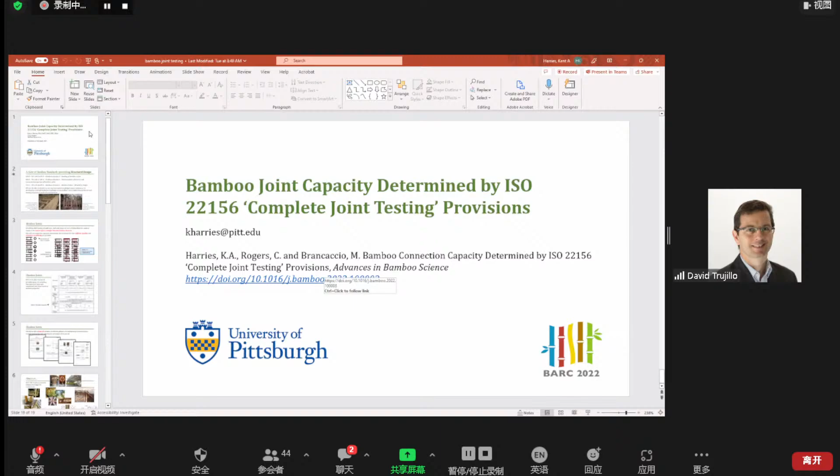All right, thank you, I'm going to share my screen. Like every good Zoom call, I will tell you what I'm doing. I'm going to share my screen, and then I will do the mandatory, can you see my slides? Oops, that's actually wrong, hang on. Yes, I can see them. Let's start at the beginning rather than the end. All right, so we're in slide mode, so there's my mandatory question. Close up that little box and we'll get started.

Okay, we're going to get started today and be talking about bamboo joint capacity by complete joint testing, the provisions of 22156. We're going to jump right into the new design standards and talk about some of the implications of these, and really show a process rather than the data. The data I'm going to show is not that important, it's really demonstrative. What we want to show is how we go about this process.

So I think at this point, hopefully most of the people online are comfortable and recognize that there are a suite of bamboo standards permitting the structural design of round culm structures. And of course, they start off with 19624, the grading standard, a procedure for grading bamboo.

David has been doing a lot of excellent work in really demonstrating how this can be implemented. We have the 22157 document, which talks about physical and mechanical properties, and these two will go together in using grade determining properties and what have you.

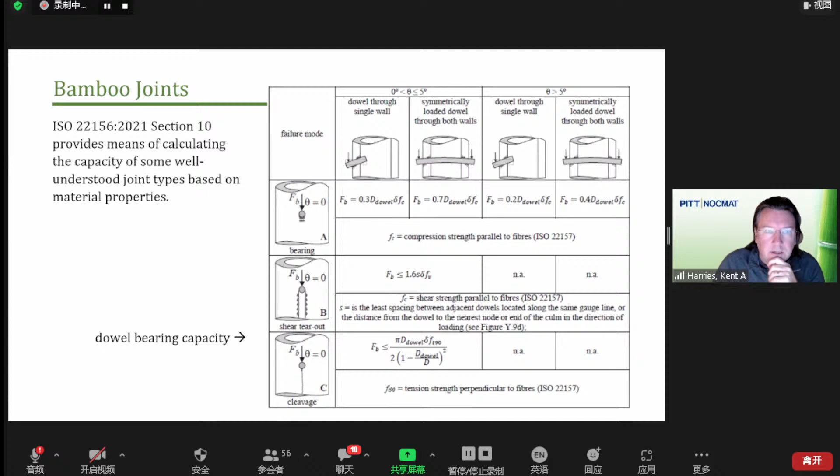Chapter 10 goes on, and references a useful informational appendix that looks at a number of rather conventional, and in some cases a little bit non-conventional, types of connections for bamboo. This is not really to say how you go about doing things. It is a bit of a roadmap. So if you're using a particular type of connection, here are the clauses, here are the parts of the code document that you really should be looking at. It's informational in that sense, and so these are useful.

But what one finds when one's designing connections, as we know bamboo connections are bamboo, the science behind bamboo connection design is quite nascent. We find that very often either we end up with very conservative designs that are very difficult to implement, or we just simply don't have a prescriptive means of design. And so we need another tool.

And that should be, and of course we need that because the potential number of different types of connections are almost infinite. We can have some very simple connections that might be appropriate in a vernacular sense, and of course we've probably all seen some very complex connections, machined connections and even 3D printed connections and what have you. So we need also a tool that can address all of these types of challenges that we have for connecting round members to round members, which is not exactly the easiest thing to do.

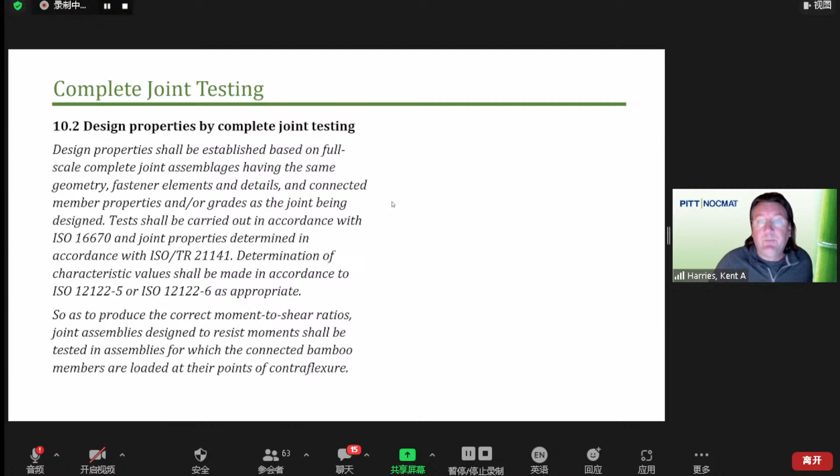There we go. And I just need to get this out of my way. Sorry, I can't see what I'm doing.

And we have a process that I'm going to take you through in this presentation. So the purpose of this presentation is not to talk about the connection that I'm about to talk about, but to demonstrate this process.

So the very first step is we ask, can the joint be designed by prescriptive guidance? And if it can, we can certainly use the prescriptive guidance in 22156. What I want to talk about now is when we can't, or we don't want to use the prescriptive guidance because we feel it's overly conservative.

And so we come into this next layer where we're going to use complete joint testing. And now we want to talk about what that complete joint testing is going to look like.

So the first step is we need to define the geometry and the material properties that we're using, the material properties maybe through 22-157 testing, or potentially through grading, 19624 compliant grading. So we can go either way there, I think. And then we actually conduct the testing.

So what I'm going to do is take you through a very simple example. It was intentionally a very simple connection, and it was also selected because it was a connection that we knew would not perform well in what we were asking it to do, because we wanted to make a couple of other points.

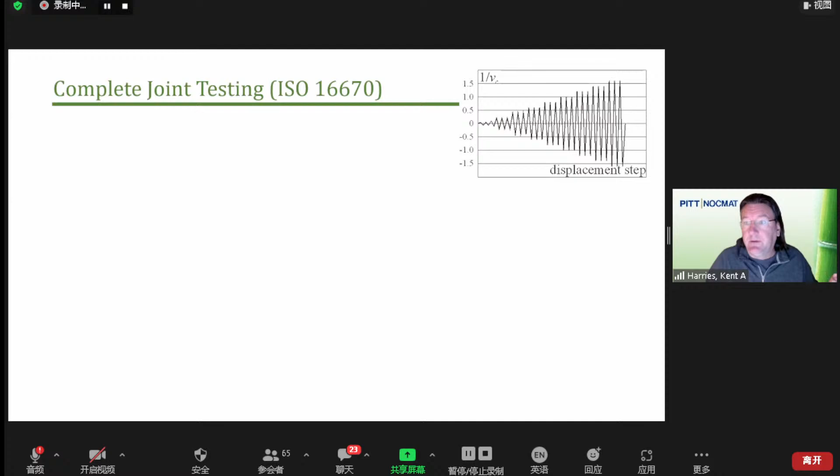Now we go into the testing, and this is what we're demonstrating. If we look at 16670, it's a process. We have a displacement load step relationship which we need to follow, that's prescribed.

So we've done the testing. Now what we need to do is determine the properties of these envelopes. What are the properties of my connection?

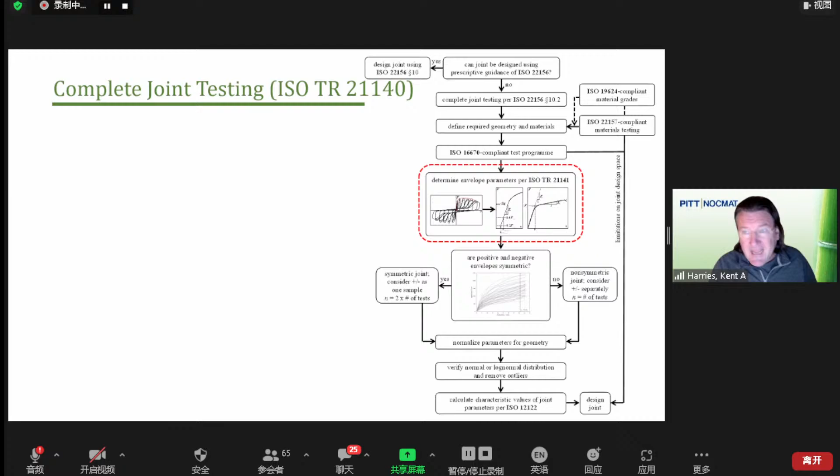We look to the technical report 21141, and we have various means of calculating the joint stiffness based on this backbone curve. If we have an essentially linear portion, we have a joint stiffness. If there's an initial slip, we account for that. If there's initial friction in the joint, different joints will behave a little bit differently, and similarly there's bilinear behavior.

In general, we're going to find that stiffness as the secant stiffness between, and the rule of thumb is 40% of the maximum and 10% of the maximum. It doesn't have to be that, but that's the guidance.

In addition, we find the initial stiffness in this manner. We then find the post-peak stiffness based again on the nature of the curve that we see. Is it a bilinear curve, in which case we just draw a secant having a stiffness of K sub P? If it's a degrading curve, we use 1/6 of the elastic stiffness.

We can use secants and offsets with degrading curves as well, or more of a typical offset method if we're looking at dowel behavior. In the case of this particular study, we used the bilinear approach.

Most of the data fit bilinear very well, in which case we have our rules for finding our yield point. We have our initial stiffness K sub E. We extend our post-peak stiffness backward until it intersects with K sub E, and we define the yield at that location. All of this is part of 21140.

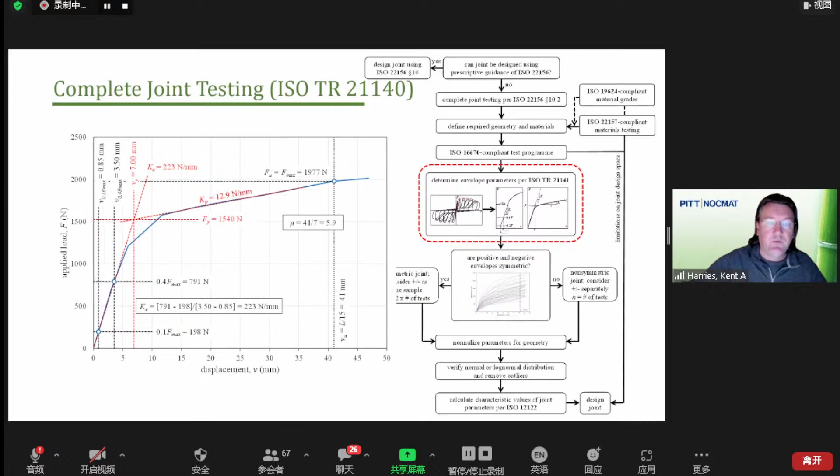Doing this to show the process, there is a data reduction process that has to be documented when we're doing this complete joint testing. This is just one example. Now, keep in mind, I've got 20 tests, so I've got 40 backbone curves, 20 positive, 20 negative.

That brings up the next question. I need to look at my data and determine, first of all, does it make sense? But secondly, in my particular case, this particular joint would be expected to behave symmetrically, where positive and negative behavior would be the same. If that's the case, we actually have 40 backbone curves. You could also imagine a joint geometry which is non-symmetric, where it's going to have a very different positive and negative capacity.

That being the case, we're going to have 20 positive, 20 negative. And so we want to test this hypothesis. In our case particularly, we want to see if we can treat both positive and negative together. So we do a simple unpaired t-test to compare the positive and negative cycles, the 20 positive and 20 negative. And sure enough, in terms of all the capacities we're looking at, the positive and negative cycles are statistically the same.

So we do have 40 data points, which actually is kind of nice and helps us out a little bit. It also confirms our hypothesis that this connection should be symmetric, and it is. If it weren't symmetric, we might want to look at a systemic error creeping in and look at our test setup.

Now we've got to normalize our parameters. It's not appropriate, typically, when we're looking at bamboo, unless we have very, very tight control, to simply look at force and displacement. We want to look at moment, rotational stiffness, and stress, because these are affected by the dimensions of the test setup, the length of the beam, and the dimensions of each of the elements. And these vary—it's bamboo. So we're going to normalize our data in terms of moment, rotational stiffness, and ultimately extreme fiber stress.

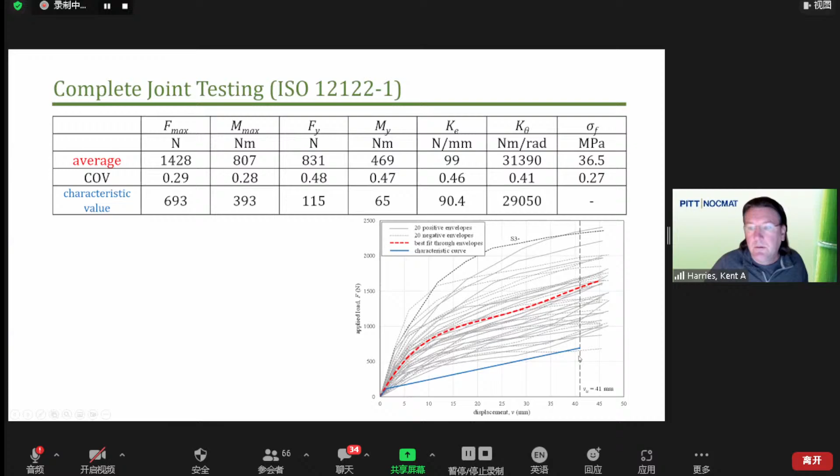Now this data, as shown here—here are all 40 curves—shows huge scatter, as we might expect from this type of connection; it's really not a moment connection. The red line is a best fit through all of the envelopes, an average curve if you wish. The blue line would be our characteristic value, assuming we're using 5% at 75% confidence. So a very low bound, very poor moment capacity for this connection, which is probably what we'd expect. That's the methodology we'd use for complete joint testing.

Just as some observations, I wanted to look at this particular test and the bolted fish mouth that we tested—after all, we have 40 data points and we may as well look at them. Our test setup actually pre-compressed, using the eye bolt to draw a fairly large force, 8,500 newtons, determined using a torque wrench. If I look at the compression force in the beam element, that's about 5.5 MPa using our average values. As we start moving this back and forth, we have different types of behavior.

We have dowel bearing type behavior, particularly at this location. It's interesting because if we look at our ultimate stress condition, we'd have tension in the eye bolt, compression at the top or bottom fiber of the joint, and opening at the opposite side. When we calculate the extreme fiber stress in this particular case, we had about 36 MPa, and that's where I want to bring you back.

The average capacity of this particular bamboo was about 43 MPa, so we're right in that ballpark. We actually designed a relatively efficient joint for what that bamboo can carry. Now, this is not an efficient means of resisting moment, largely because we have such a small lever arm that we can't get much force out of this, even with a relatively large stress.

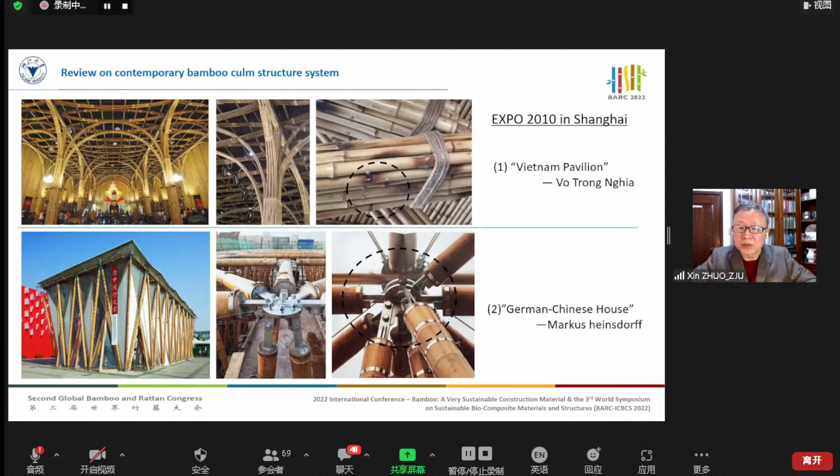Let me briefly review contemporary bamboo structure systems. At the Expo 2010 in Shanghai, there were two outstanding bamboo structures. One is the Vietnam Pavilion built by Mr. Vo Trong Nghia, and the German-Chinese house designed by Markus Heinsdorff. These two buildings, designed very differently, displayed two structural systems of current original bamboo structures.

There are many varieties of bamboo arch structure systems, including planar bundle bamboo arch structures, cross bamboo arch gel structures, and cross bundle bamboo arch structures. The construction of contemporary bamboo structure has been greatly aided by these remarkable structures. A large number of emerging bamboo grid joints have been developed in recent years.

Back in China, in recent years there have been many bamboo structure buildings developed. However, we noticed that while there were numerous bamboo arch structures, there were very few bamboo grid structures. We believe the major cause is that fabricating multi-directional joints is too challenging. It's difficult for businesses to manufacture, but if they try to purchase it from the market, it's very expensive.

The bamboo industry specializes in creating bamboo arches, so if they can produce bamboo arches themselves, they can generate higher revenues. Having said that, the bamboo arch structure system still has a cost issue because currently we mainly depend on artisans manually bending these curves by fire. It's low productivity with higher labor cost. As a result, bamboo arch structures have no cost competitiveness over timber structures, which is very unfavorable for the development of bamboo buildings.

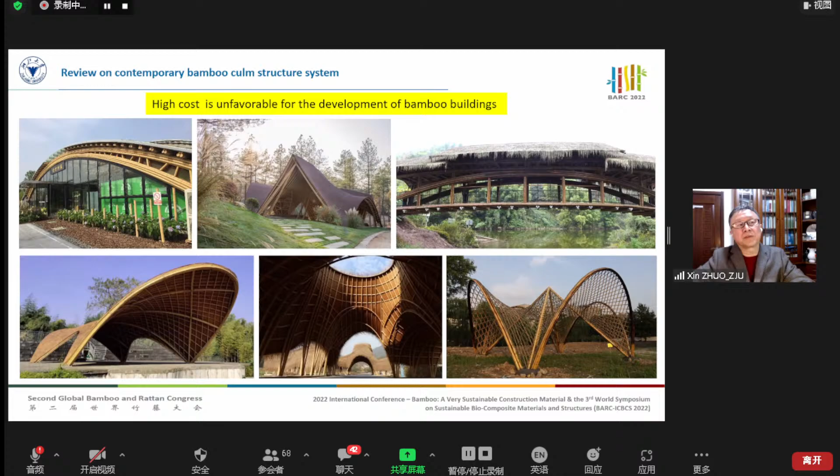We know that bamboo and timber are both bio-based materials. So if bamboo does not have a cost advantage, why should customers select bamboo, because it lacks mechanical qualities compared to timber? So we need to maintain the cost advantage.

There are two types of bamboo culm structure systems. High expenses are mostly a result of hand-bent bamboo tubes and customized multi-directional joints. It depends very much on the labor and the skillfulness of the labor, so we cannot standardize the construction results.

On the contrary, the bamboo culm grid structure has straight culms and low cost, but the disadvantage is making multi-directional joints lack universality. So what we at Zhejiang University are trying to do is combine the advantages of these two types. We use a straight rod plus bolt because a straight rod and bolt are both less expensive. But can we directly combine the two structures? It's impossible, so we have to come up with an alternative solution.

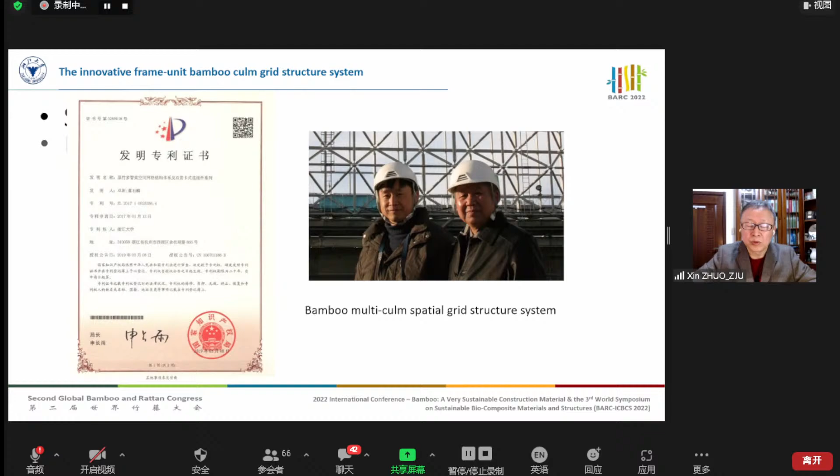Next, I want to move to the innovative frame unit bamboo culm grid structure system. In 2017, I followed my PhD supervisor, Professor Dong Shilin. We jointly promoted the bamboo multi-culm spatial grid structure system and got the patent. I'll give you a simple example.

We all know that for a grid structure, at the very beginning we would start with the axis and the geometry sizes. The key to the construction is the spatial layout of the connections and joints. What we are doing here is making the initially complicated three-dimensional connection into a straightforward one-dimensional connection. So you can see this is a very simple structure. No matter how complicated the shape of the construction, we do not need multiple dimensional connections.

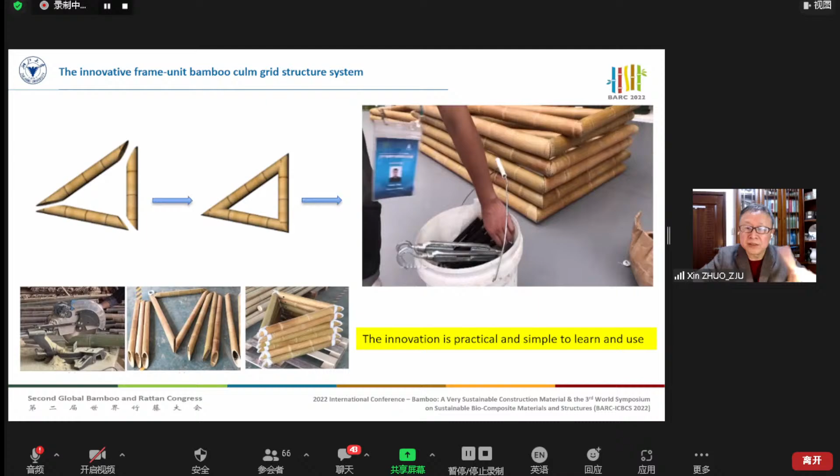We streamline the 3D connection issue into a 1D connection. There are two-step processes. The first is to fabricate the component in the factory. Second is on-site construction. For the on-site construction, first we drill the holes, and then connect the triangular frame by bolt to form the whole structure.

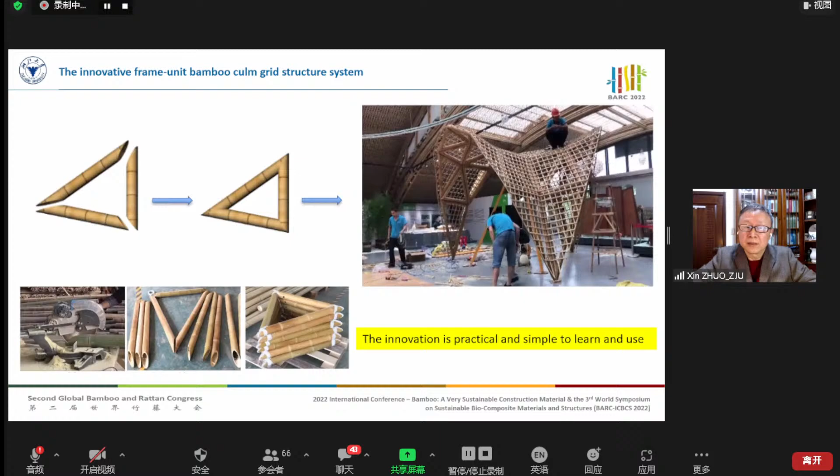You can see this is very easy to construct, very easy to learn. For the workers, if we teach them to do one triangular structure, they can repeat the whole process. For the whole construction team, if we can teach them the first project, then we can have a hands-off attitude, and we just provide them the data, and they would follow the exact steps as the first project. Very easy to learn.

Since 2019, we have created structures in the hyperbolic paraboloid. On the left-hand side, you can see this structure. I want to thank INBAR for your support and trust. After that project, we completed the cylindrical and spherical structures, which shows that these structures are quite suitable for the traditional steel structure constructions.

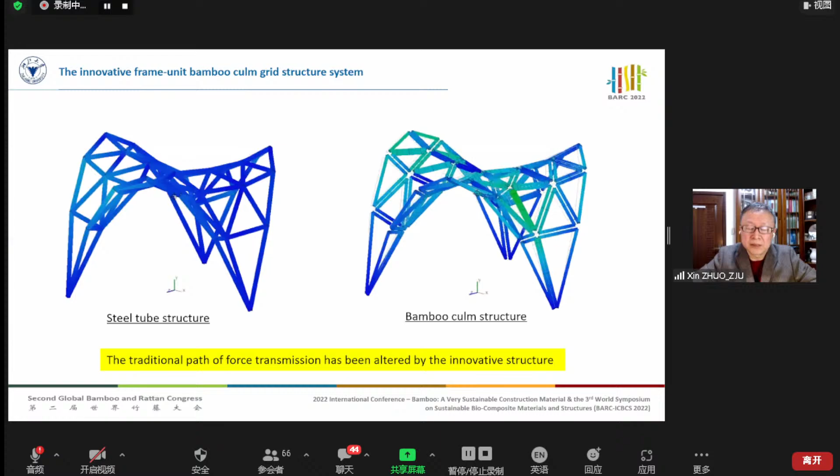But I'd like to draw your attention to these stress transition routes. You can see on the left-hand side is a steel tube, on the right-hand side is the bamboo culm. With the same wind load, the right bamboo culm structure deforms differently than the left steel structure. Of course, we need further study on the internal forces. Having said that, we can still see the stability of the bamboo culm structure.

Currently, we already completed from 0 to 1. But how can we make it from 1 to 100? This is a remaining issue. To make these bamboo structures more beautiful, cheaper, and environmentally friendly, we decided to change the combination method.

For example, some of these constructions use 2 bolts, some use 3, some use 4. It depends very much on the inner forces. This is the first consideration.

Second consideration: if there is any large span needed, this is for the 2022 Hangzhou Asian Games for the athletes and journalists reception center. Because this is a temporary construction, in order to save the cost and also to promote an environmentally friendly concept, they decided to use bamboo. We have 2 alternatives provided. The second one is a spatial grid truss to increase the structural rigidness so we can have a larger span. But unfortunately, due to COVID, this project was delayed until next year.

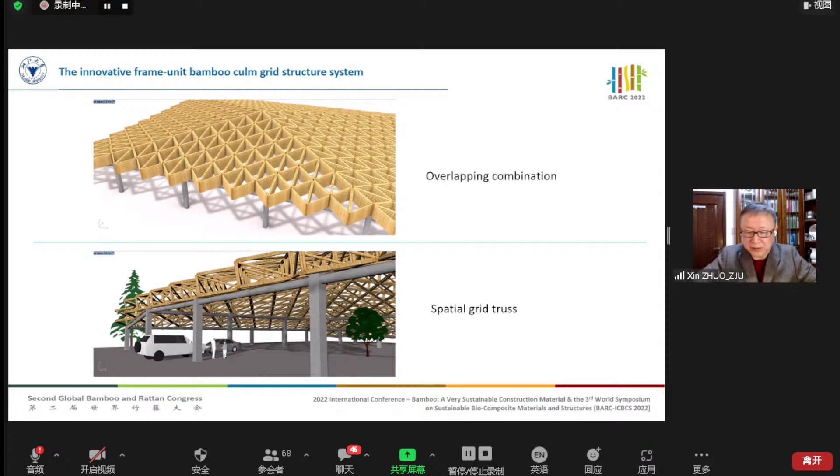So we hope that in future, other countries or cities, if we want to test the structural design, we can test it in the field. Another thing is the durability issue. For a bamboo structure, I think the biggest question is...

Hello? I don't know what happened. Zhuo, can you hear us? I think we lost him. Still connected? Let's wait 1 minute if he can reconnect, or we will move to the next speaker. David, what do you think? Yeah, let's give them a couple of minutes and then we'll move to the next speaker. Unfortunately, this is the problem of online meetings, right? Sometimes people disappear without any warning.

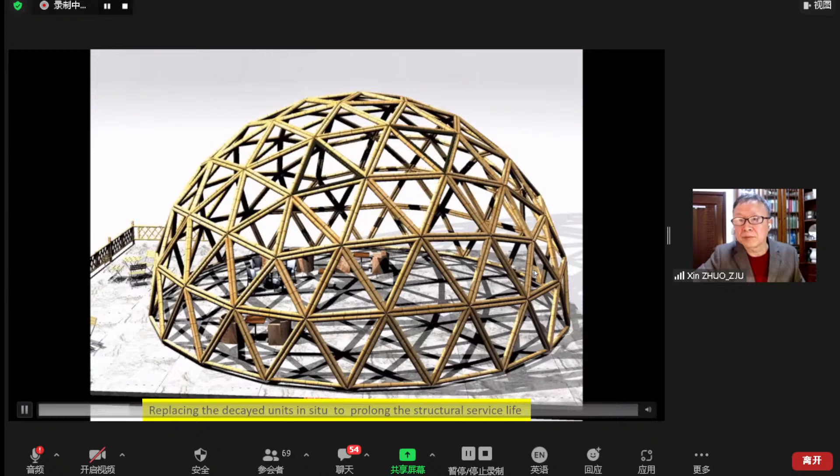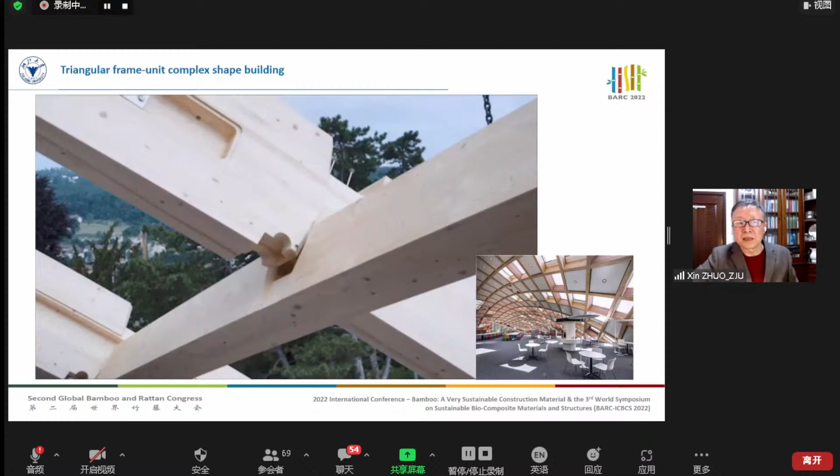Every piece has to be bespoke. The 2019 Swatch headquarters in Switzerland uses a similar design with timber. You have to be very precise when you make such a structure. Everyone wants to make a very beautiful, magnificent structure. Modern technology allows you to make such complex structures, but can anyone afford it? That is an issue.

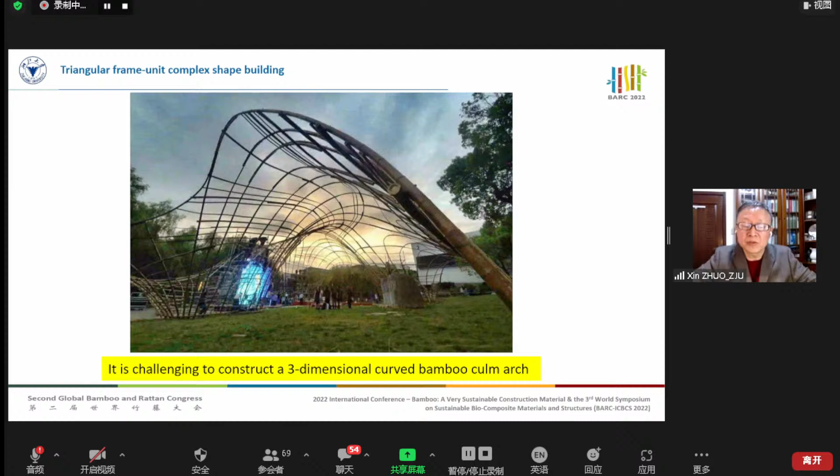The final one is a quadrilateral frame unit for residential buildings. Even with high-rises, people still want wood or bamboo interior decor for floors and walls. In many countries we have 2-story low-rise buildings made of wood, where structure and interior decor are two in one—no need for secondary interior decor.

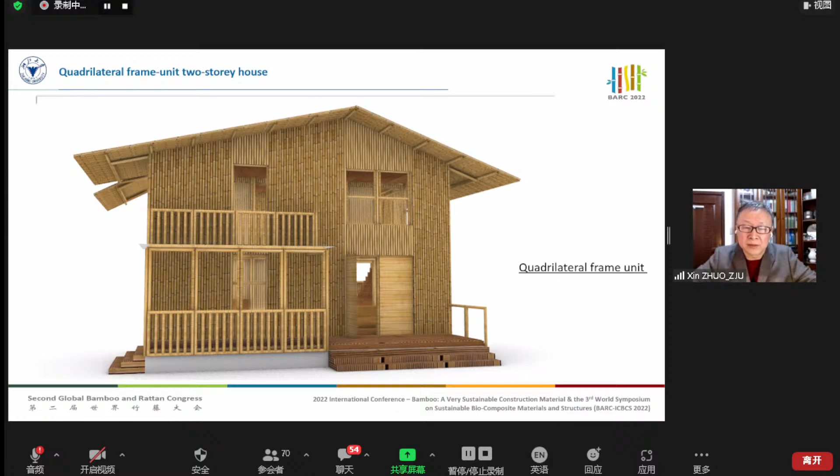It is like modular, installable in situ, and the connection method was explained before. It's a quadrilateral frame, while the other is triangle—of course they have different mechanical properties. We just want to offer a second choice for people: if you really like timber or bamboo structure for a construction project, you can have a good value-for-price, lower cost alternative choice. Our student also designed and built a miniature building.

We also work with B&B hostels, and we have some structural designs using block-based smart calculation algorithms for fast programming and to figure out the spatial dimension layout of different building blocks for high efficiency design.

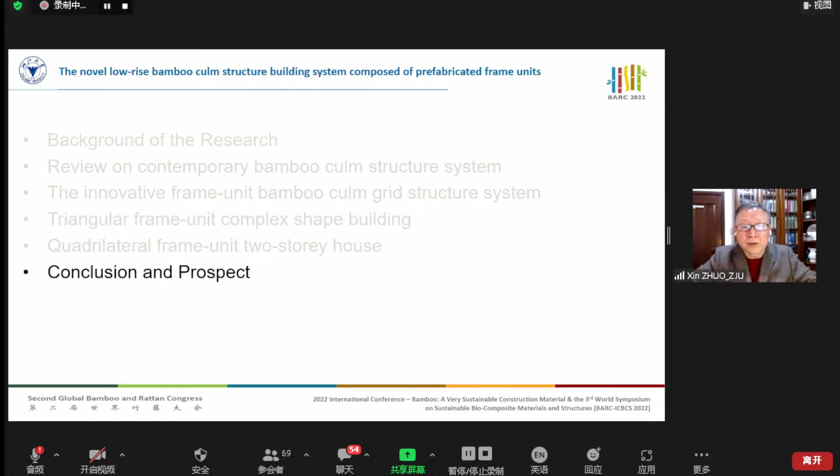Final conclusion: engineering practice verifies the viability of the prefabricated frame-based low-rise bamboo culm structure building system. It has low technology intensity, and is simple to learn and spread. Second, the triangular frame unit bamboo culm grid structure is most cost-effective for complex-shaped buildings. Low-rise bamboo culm structure houses have enormous market potential as long as the quality meets the expectations of modern people and the price is affordable.

It has huge market potential. Number four, replacing the decayed frame unit in situ is an effective way to prolong the service life of the bamboo structure. Okay, I've finished. Thank you very much.

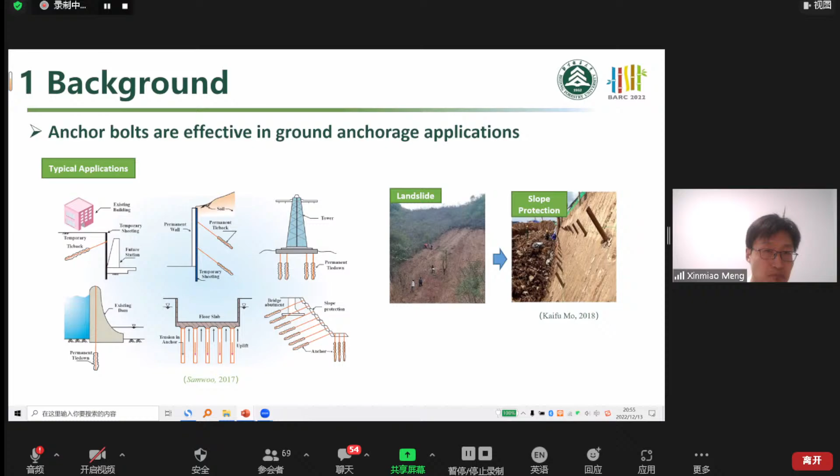In addition, the anchor bolt could be used in lots of applications as shown in this figure, and it has been proved that the anchor bolt is effective enough in ground anchorage applications. Generally, anchorage bolts can be divided into 3 types, including mechanical, bonded, and hybrid ones, and they mainly carry on axial tension in soil slopes.

We usually use steel bar and some conventional materials to produce the anchor bolt, like steel, wood, and bamboo products. In addition, some new materials have been explored in anchor materials like FRP, GFRP, and composite components. At present,

we want to use some green, ecological, and sustainable materials to reduce carbon dioxide emissions, and we also need to increase the ductility. In this regard, we proposed a new composite anchor bolt.

It's composed of FRP, fiber reinforced polymer, and bamboo materials. It has a self-anchored U-shaped end, and it also contains 2 kinds of grout materials: one is ecological grout, like ecological concrete, and another is high-strength grout.

Using this anchor bolt, we can combine the plant root system and the FRP composite bamboo anchor bolt. We want the root to grow into the anchor bolt, and in this way, an integrated anchor slope protection system can be developed once the root grows into the U-shaped end.

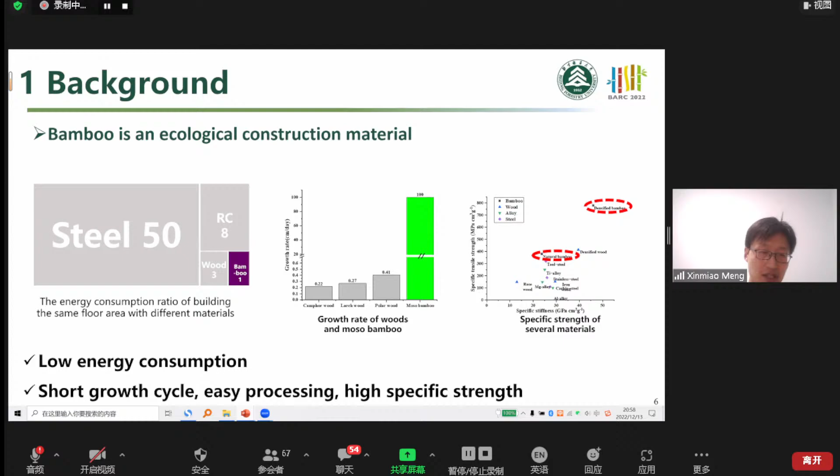We also calculated the carbon emission factor for round bamboo. It was found that the emission factor for round bamboo is very low compared to conventional materials, and if we consider carbon sequestration, it can be a negative carbon material.

In the carbon emission factors, the major part comes from the thermal bonding process, as Professor Zhuo mentioned. If we reduce or replace this liquid natural gas (LNG) with solar energy, we can decrease the carbon emission factor significantly.

So we think bamboo is an ecological building material. Another thing is that China has abundant bamboo resources, which helps reduce the cost of bamboo structures.

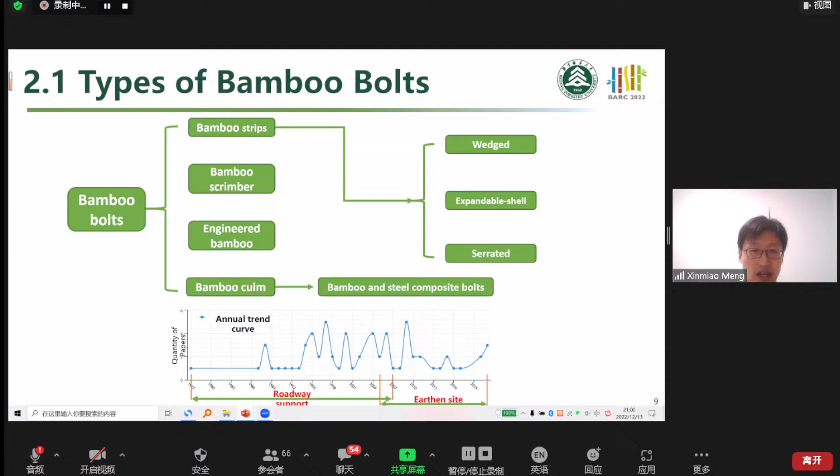Then we conducted a literature review of bamboo bolts. We found that bamboo bolts have been used since 1977, mainly in roadway support of coal mines and earthen site protection. Different bamboo materials have been explored, including strips, scrimber bamboo, engineered bamboo, and bamboo culms.

For the rigid structure, like the steel bolt, it is used on the ground side anchor head, including single-wedged and multi-wedged ends. Another option is that if we want to increase the anchorage, we can use an expansion shell in this place.

Besides the wedged ends, bamboo bolts can be designed as serrated segments. For scrimber bolts, it is very similar to steel bolts, since both its strength and durability can be improved a lot.

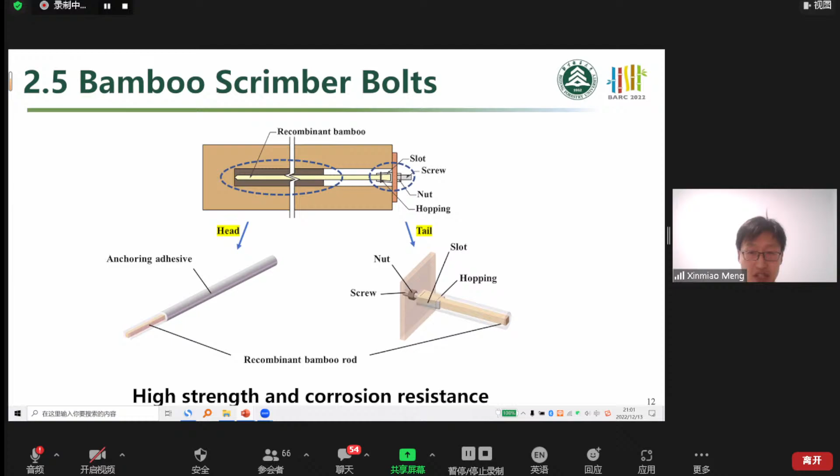Also, round bamboo culms can be used individually or combined with steel rebar, as shown in the figure. They have already been applied in earthen site protection.

Next, I will introduce the self-anchored bamboo bolts. The U-shaped anchor bolts could be defined with the slope angle, the thickness, and the diameter. And it can be achieved by two methods: thermoforming and winding.

Like Professor Zhuo mentioned, we can use thermoforming to make the curved bamboo culm, but the temperature is unknown, and the carbonization of the surface cannot be avoided. So we want to improve the thermoforming process and obtain the suitable temperature range. We studied different thicknesses of the bamboo strips and applied different temperatures.

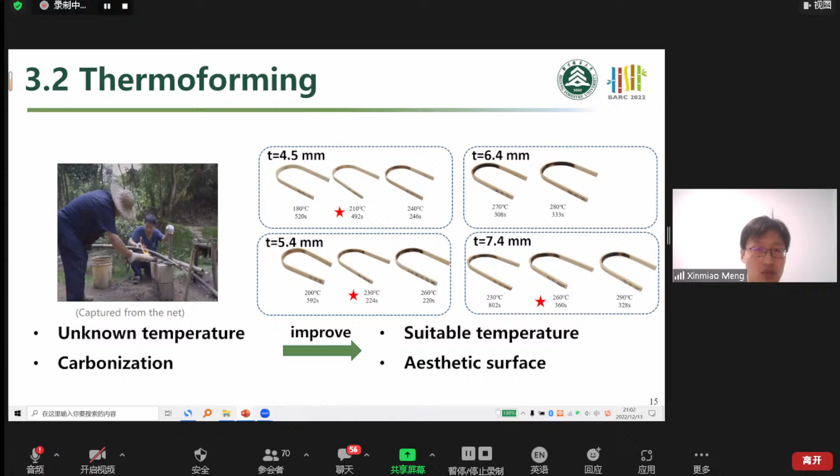We also conducted a 4-point bending test. We found that the flexural modulus changed with the temperature, but I think more microscopic research should be done to explain the relationship between the modulus and the temperature. We just found the trend, but we didn't find the rule.

Then we tried another way to make the U-shape, which is a winding method. We use the bamboo strips and winding with FRP to get FRP bamboo composites. We developed a method based on image recognition to design the mechanical properties of bamboo bolts, because different strips vary.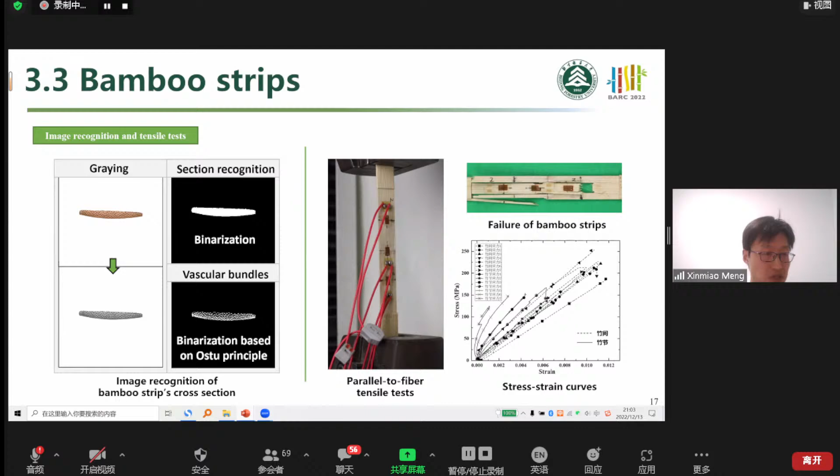Here's the relationship between the fiber volume fraction and the tensile strength parallel to grain. Then we conducted the tensile test for the bamboo bolts. In this case, the GFRP was just used as the coating. We found that most of the specimens filled with fiber rupture at the U-shaped end.

We also designed a pull-out test. It was still under test due to COVID-19, but the theoretical analysis has been done.

We divided the self-anchor composite bolt into two parts. For the linear part, we built a model to predict the shear stress at the interface and the tension force. We tried two models; this one is based on the half-space model and elasticity.

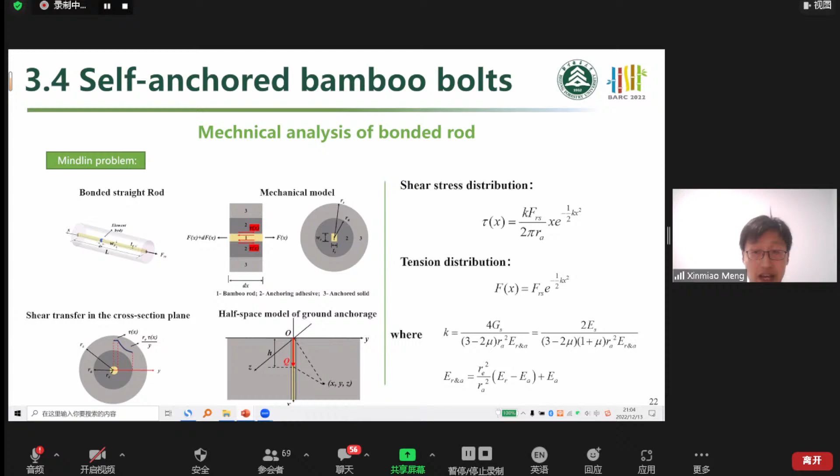We conducted parameter studies to find the relationship between the elastic modulus and the shear stress distributions. Another method is the bond slip constitutive model. Among these models, we prefer the trilinear model to predict the bearing capacity.

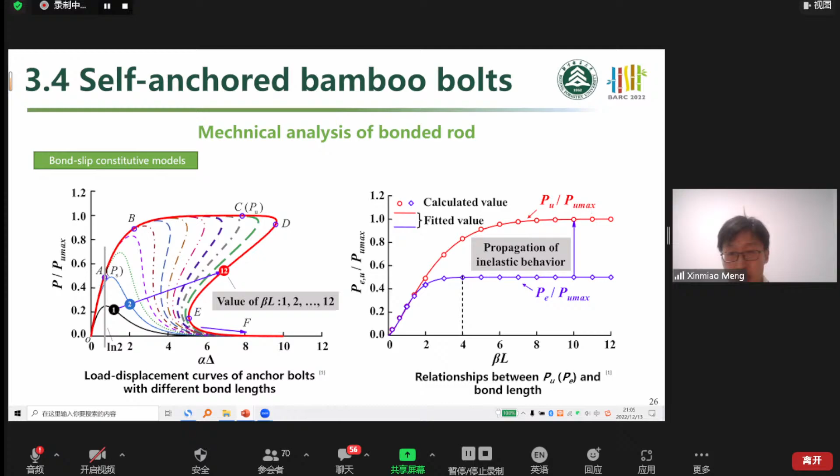After the U-shaped anchor, we combined the thin shell model and the thick shell model to get the load distribution and stress distribution across the section. But for the thin shell model, because it didn't consider the thickness, we don't know the stress distribution across the cross section.

For the thick shell model, we can obtain the stress distribution across the cross section, but we cannot consider the friction at the interface. So here are the results: we can get the stress distribution along the bolt and across the cross section.

Then we combined these two methods together, and here are the theoretical results compared with the experimental results. We found the results showed large deviation, so we think we need lots of tests to evaluate the accuracy of these two models.

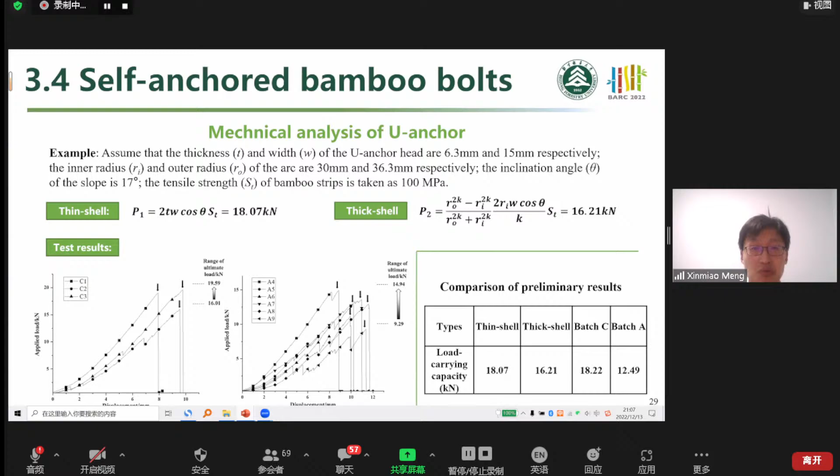We also conducted a finite element analysis to verify the theoretical model. It proved the effectiveness of the thick shell model.

Here's some conclusions for the self-anchor bolts. First, we found the temperature is related to the elastic modulus, and we need to optimize the temperature for each thickness. The U-shaped anchor could improve the tensile and load carrying capacity for the anchor bolt.

We also studied the theoretical analysis based on elasticity and the thick shell model or thin shell model. We think that if we want to fully develop the tensile strength of the FRP and bamboo materials, we need to design its slope angle, thickness, and also the inner diameter of the bolt.

So finally, in the end, we draw two conclusions. First, we proposed an ecological self-anchored FRP bamboo composite anchor, but we also need more tests to verify our concept. We think it can provide enough load carrying capacity and durability, because we want the FRP to provide durability, and if the root grows into the anchor bolt, we think we can build an integrated slope protection system.

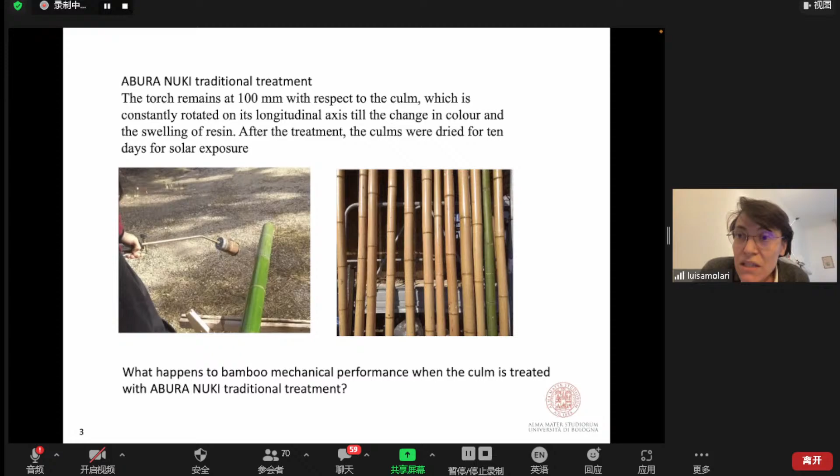So our question is: what happens to bamboo's mechanical performance when a culm is treated in this way? To answer this question, we took a culm — this is part of a study on the mechanical characterization of Italian bamboo.

We took Italian bamboo of the Phyllostachys viridis species from the central part of Italy, from Macerata, provided by the Polyedra Association, which uses bamboo in social contexts.

We took these culms and selected two parts: a bottom part from 0.5 to 1.5 meters, and a top part from 2.5 to 3.5 meters.

We performed tests on these two parts of the culm, both treated and untreated. First, we looked at density and moisture content, and found that density is slightly higher in treated bamboo compared to untreated, but not statistically significantly so — going from about 680 kilograms per cubic meter to 740 kilograms per cubic meter.

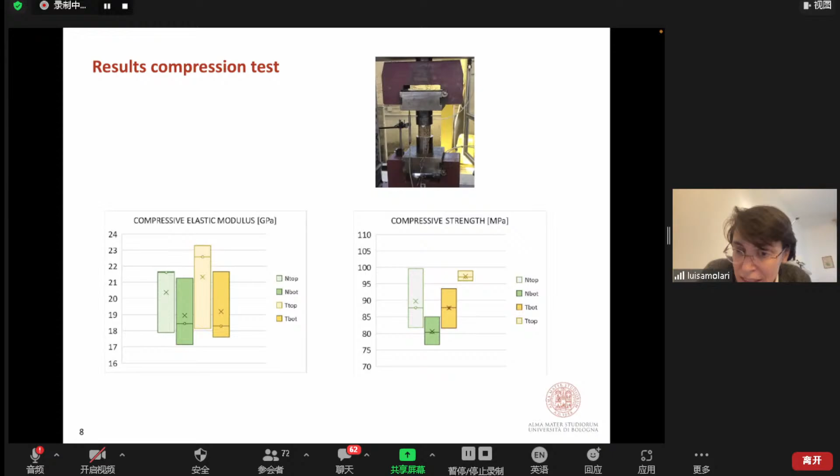For the compressive strength, we see more or less the same thing, because if we compare the darker with the darker and the light with the light color - the part from the bottom and the part from the top, each with its corresponding specimens - we do not see much difference even in this case.

What is quite different between treated and untreated samples is the Poisson ratio, which is the ratio between the circumferential and the longitudinal deformation of the specimen. For the untreated, all the specimens are in a much closer range compared to the treated samples, and this could have an explanation - I will come back to this in the following slides.

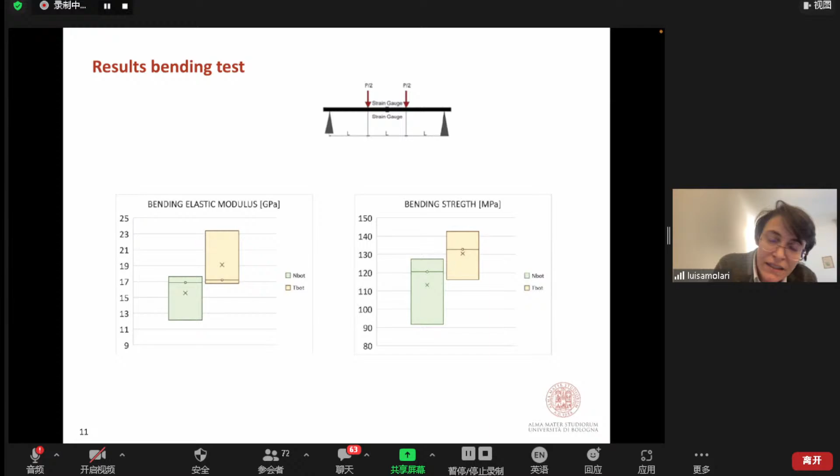For the specimens after the bending test, we took micrographs with electron microscopy, and we see that for the treated samples we had a sort of texture - there are some cracks between the island of fibers and the parenchyma cells. I hope you can see it, but the differences between the two are evident.

This could also explain the differences in the Poisson ratio, because we do not see damage in the direction of the fibers, but we can see damage between the fibers and the parenchyma. This could bring more or less the same behavior in the direction of the fibers, but something different in the direction orthogonal to the fiber itself.

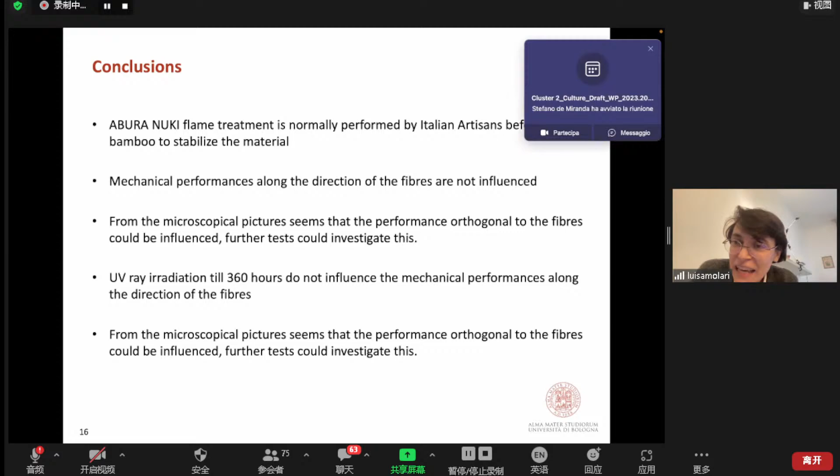For the duration of the irradiation, because we started to see a slight damage on the mechanical performance.

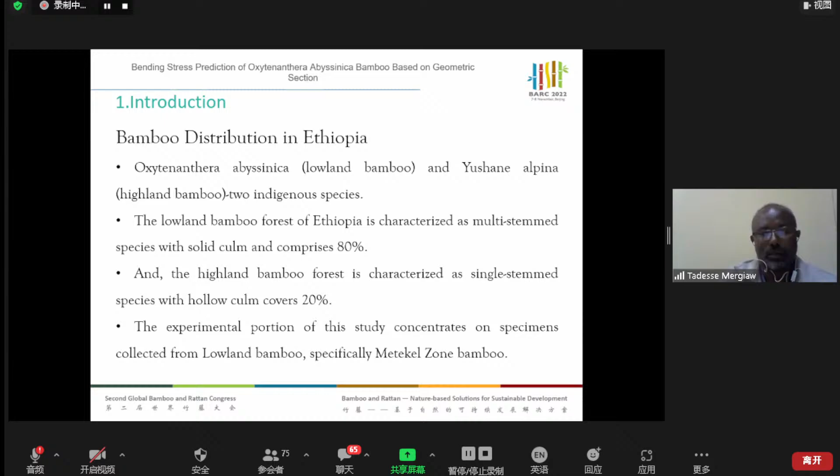Considering the culm geometrical shape, these two species have different geometry.

Yushania alpina is 10 to 12 centimeters thick and consists of a hollow culm. It may have a maximum height of 16.75 meters, as previous research reveals.

While the Oxytenanthera abyssinica bamboo has solid, semi-solid, and hollow sections. When you take a 3.5 meter section...

...it consists of a solid section from the bottom, a semi-solid section at a certain height, and again a hollow section.

But these sections vary depending on the age. I mean, when the bamboo is at 1 or 2 years of age...

...the semi-solid and hollow sections are a little shorter, while consisting of less solid section, in a 3.5 meter specimen.

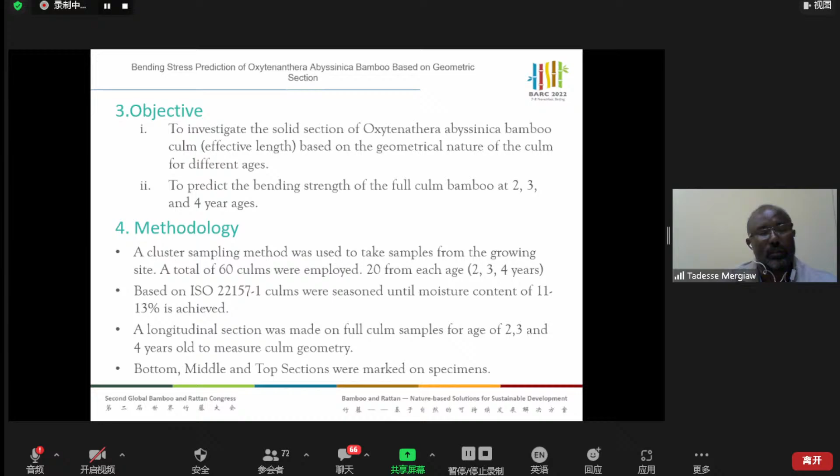This is the area where the bamboo is collected, in a region we call Metekel. As shown, the bamboo species is sketched as solid section, semi-solid, and hollow sections, then it is clustered, categorized, and measurements have been conducted.

This is a simple sketch of how the cross sections look when the bamboo is sampled at 2.6 meters, showing solid section internodes, while at 2.6 to 3 meters, how the hollow sections look, and the cross sections beyond 3.2 meters having a hollow. So systematically we have a solid section sampled, other lengths up to semi-solid sections, and the hollow sections within a 3.5 meter specimen.

So the next step, to conduct the flexural test, a test rig is prepared, and using a UTM machine, applying the load, we start measuring.

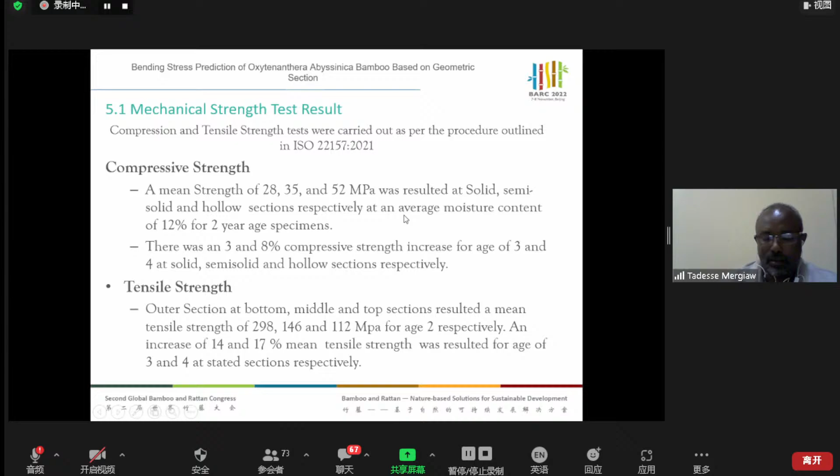The other testing, the main part of the research, is the bending test result. As mentioned earlier, the bamboo was categorized by age 2, 3, and 4 years, with bottom diameter and solid section length, as previously stated, and the internal length and top diameter geometrically measured, giving us the ratio of top to bottom. Then the flexural strength and mid-span deflection is measured.

These results are outputs from the UTM machine. Based on the statistical analysis, the length of the solid section at age 4 is shown here, where the horizontal axis is the ratio of top to bottom diameter, and this is the length of the solid section. For 4 years, it's expected an average of 2.8, 2.5 for solid section length, resulted at a mean diameter ratio of 0.64.

For age 3, when the ratio of top to bottom diameter is an average of 0.77, the length is less, 2.6, 2.5 is resulted. At age 2, it's 0.83 mean diameter ratio, top to bottom ratio, but the length of the solid section is below 2.4. So from this result, we can estimate that a maximum of up to 2.8, 2.85 meter solid section length is available at age 4 when the diameter ratio is 0.64.

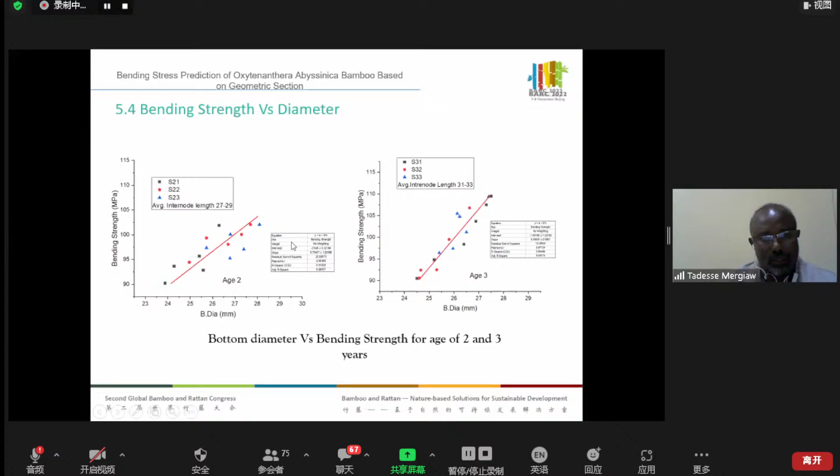The other result from this research is the bending strengths versus the diameter ratio, and bending strengths versus bottom diameter. The results in 3 specimens, 3 types of specimens, are conducted, shown here similarly at age 2 and age 3.

So the final bending result values: the solid section is predicted linearly with 5.8D, 6.4D, and 7.2 times D for age 2, 3, and 4 respectively, with the statistical values in each section. Here is the final conclusion resulted from the statistical analysis.

That's my presentation, it's a very short one. I finalized it in this way.

Thank you very much, that was a great presentation. I greatly enjoyed it. I have a lot of questions, but we'll leave them for later on. Alright, Christopher, over to you. Alright, alright.

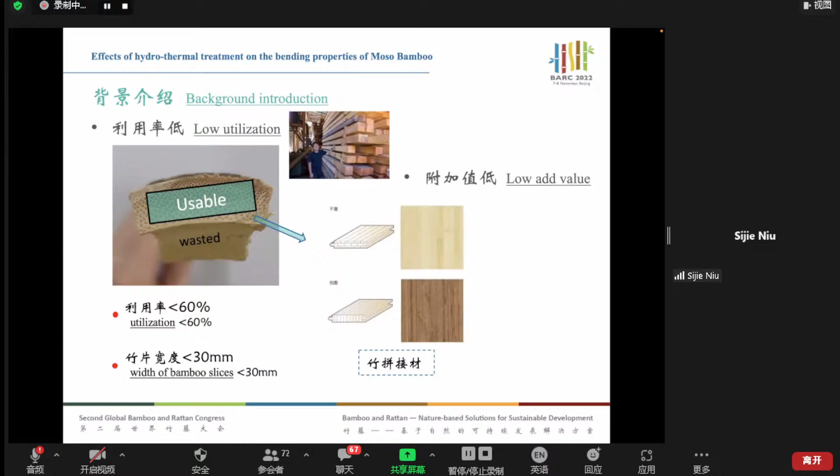The origin of my project is based on the National Key R&D program during the 14th five-year plan period. Our purpose is to improve the bamboo utilization ratio as well as improve the added value.

We try to first develop the bamboo into bamboo slices and make them into laminated plywood. Although the technology is not very new, we seldom see corrugated bamboo mat plywood. During the processing process, we understand that due to the poor toughness of bamboo material, it severely limits the form of bamboo products.

So we use some solution treatments, and we also use a water bath treatment method. Based on the different temperature, you can see the concentration level differences with regard to elastic modulus and bending strength. It's negatively correlated to the temperature and the concentration. With a longer period of higher temperature treatment, bamboo can become more flexible.

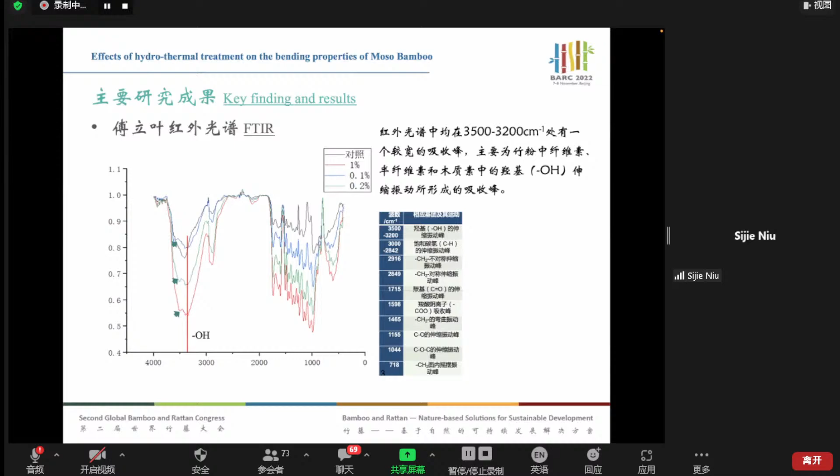This is using the FTIR testing method. You can see after this FTIR, there is a significant change in cellulose, hemicellulose, and lignin in bamboo powder. Without treatment, you can see there is a small absorption peak here. In the interest of time, I would skip the detailed elaboration of this graph.

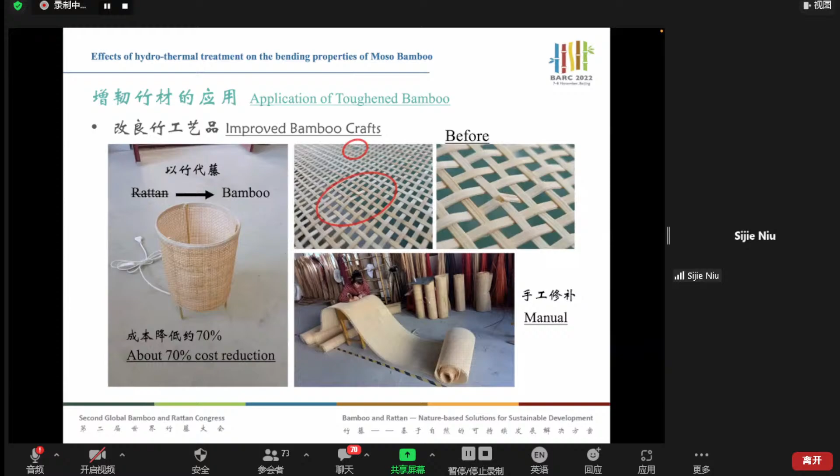Previously, the company used manual or skillful workers to repair breaks using glues and adhesives, but this resulted in very low productivity and high labor costs. However, after our toughened treatment, you can see the comparison before and after. On the left is before treatment, and on the right-hand side is after treatment. You can see the radius of curvature is significantly reduced.

And to some point, it can break, just like steel materials. That is before treatment, but after the treatment, you can see there's no breakage, no splitting of the bamboo. That shows the performance after treatment improved thanks to the absorption of the energy.

The right-hand side two pictures showed the final result after the toughened treatment process. You can see this is a very large size product, but there's no breakages.

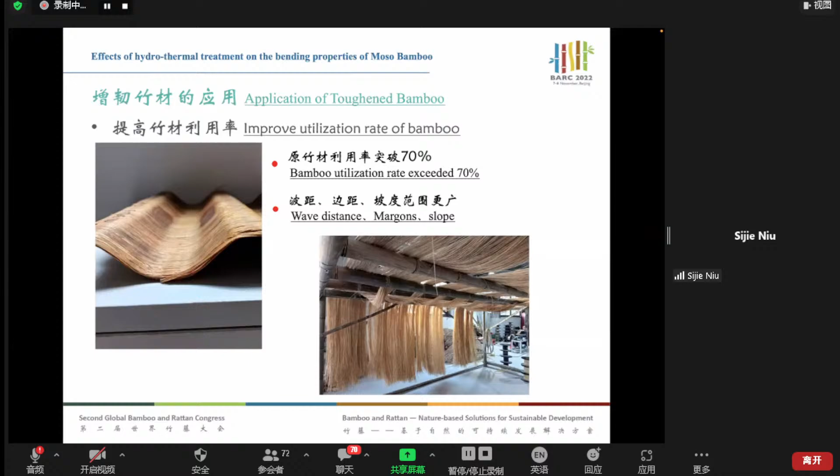After this treatment, we can improve the utilization rate to over 70%. Of course, this is only a lab test result. Secondly, we can have a wider selection on the wave distance, margins, and slopes.

Next, the prospects of bamboo toughening technology. Currently, we know that a lot of inner decorations inside the automobile and aviation interior use bamboo fibers.

But due to the properties of fibers, sometimes it's not strong enough, not toughened enough, especially with a larger span. It's very easy to break.

Especially for those unique shapes, it's difficult to apply traditional bamboo fibers, but with this toughened process, we can use bamboo fibers more widely. Previous speakers also talked about this fire treatment method.

And then the cellulose will crystallize, and... okay, thanks, I will finish.

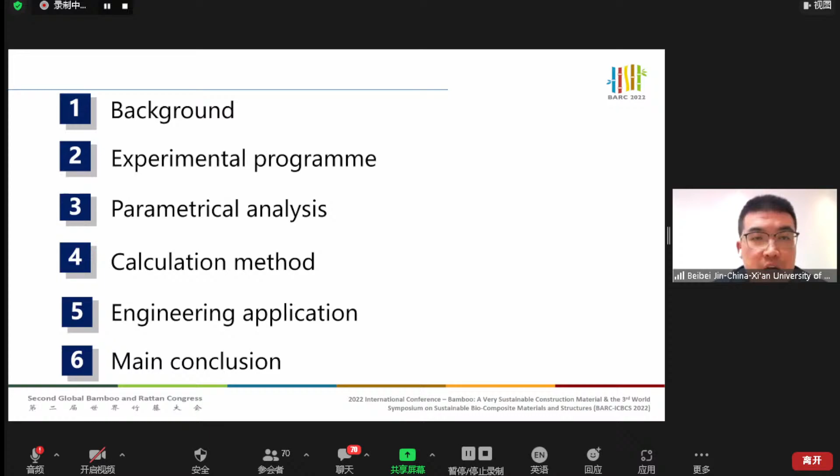I'm from the Xi'an University of Architecture and Technology. I'm a PhD student. I'm talking about the study on axial compressive performance of sprayed composite mortar original bamboo composite columns and engineering application. So I will talk about background first.

First, the construction sector has a low raw material and resource use efficiency, with serious pollution and energy consumption. So we really want to choose the best feedstock or best material for the construction.

Currently, we try to be lightweight, environment-friendly, and sustainable. China has a huge production output of bamboo. Naturally, people are looking into bamboo as a possible candidate.

Advantages include short growth cycle, green, eco-friendly, high strength to weight ratio, good deformability, and disadvantages include irregular geometry, initial natural defects, rot and moth-eaten durability issues.

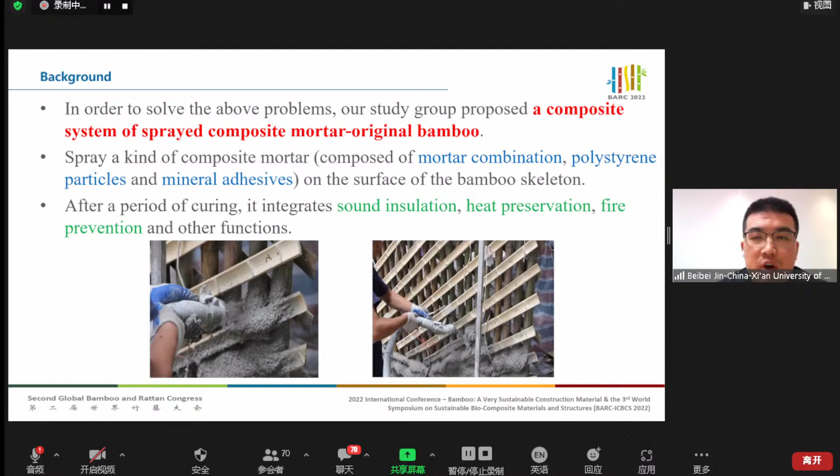So when we combine the two sides, we try to use a composite design. In our team, we propose a new type of bamboo structure: sprayed composite mortar and round bamboo. And we published some papers in Chinese and foreign journals.

We spray a kind of composite mortar composed of mortar combination, polystyrene particles, and mineral adhesives on the surface of the bamboo skeleton. And after a period of curing, it integrates sound insulation, heat preservation, fire retardation, and other structural functions.

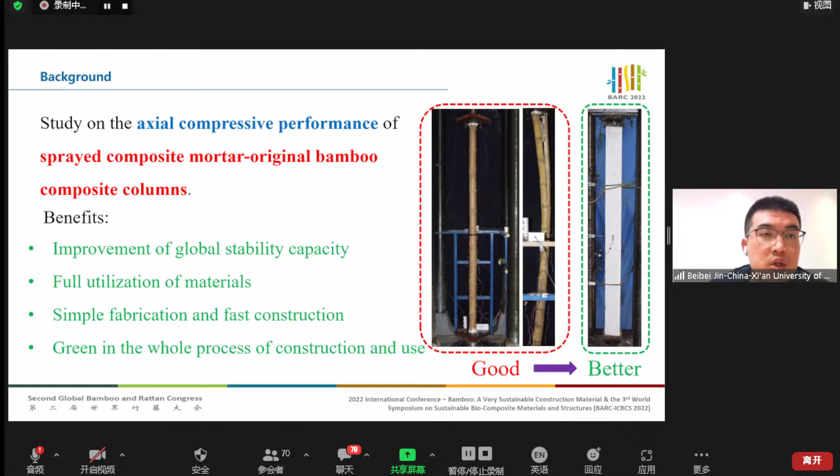I will talk about the second part: the axial compressive performance of sprayed composite mortar round bamboo composite columns. It can improve global stability capacity and fully utilize the materials. It is simple to fabricate and easily assembled, and green throughout the whole process of construction and use. Coming from round bamboo, after using this composite structure, it's even better in terms of performance.

I've designed specimens with longer and shorter columns. We have round short columns, and also coated mortar or sprayed mortar coated columns, and thirdly, aligned composite mortar with a square cross-section, and also a round cross-section with a protrusion, and aligned cross-section round cross-section columns. We can also mix and match different dimension specifications of specimens, cross-sections, and loading modes.

We have a full section loading, or only load onto the bamboo part of it. We are actually looking at the loading methodology of reinforced concrete within steel iron tube, and also some failure modes.

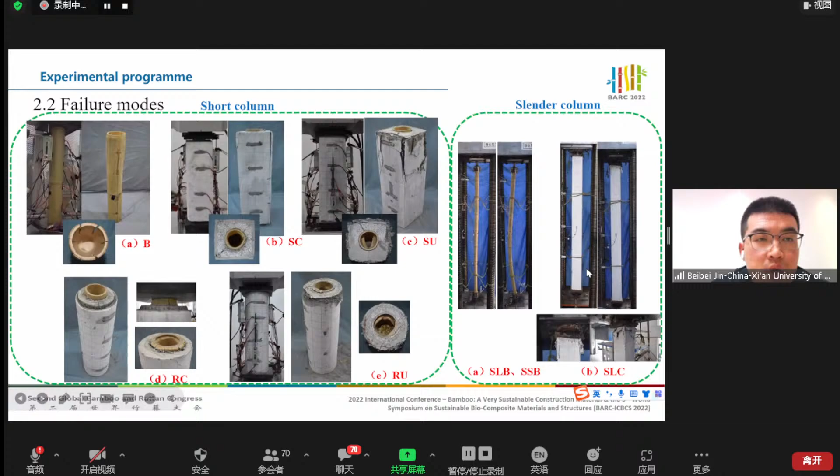The first short round column, we can see the wall is fractured. B, C, D, E are composite, with protruding, aligned, square or round cross-section. We have mortar failure or inward fracture of the column. Also for the slender column, at the two sides we have local failure, but not along the whole length.

We also analyzed some data. First, the diameter of the bamboo. For a round bamboo short column, when the diameter increases, ductility will drop. But for the composite column, the axial compressive strength and maximum strength will go up as the diameter increases.

Secondly, with the sprayed composite mortar compared with the short column, square versus round cross-section: the axial stiffness is not significantly improved, and the ultimate load decreases slightly, but the ductility is greatly improved.

And with sprayed composite mortar, you can see this is a circular cross-section. The axial stiffness, ductility, and ultimate load are all greatly improved in the circular cross-section.

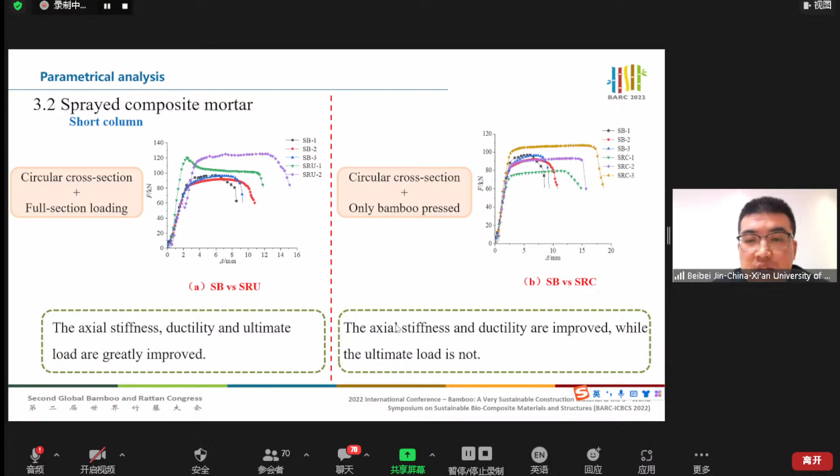This is for the circular cross-section plus only bamboo pressed. You can see the axial stiffness and the ductility are improved, while the ultimate load is not.

This is the sprayed composite mortar slender column. After spraying the mortar, it will improve the stability, and the axial stiffness and ultimate load are improved, but the ductility is not, because it is shifting from stability failure to strength failure. Both ends have a brittle failure, so the ductility is not improved.

For cross-section form, short column, full section loading mode: the mechanical performance of composite short columns with a square cross-section are better than those with circular cross-section. With only bamboo compressed, the mechanical performance of composite short columns with both cross-sections are basically equivalent.

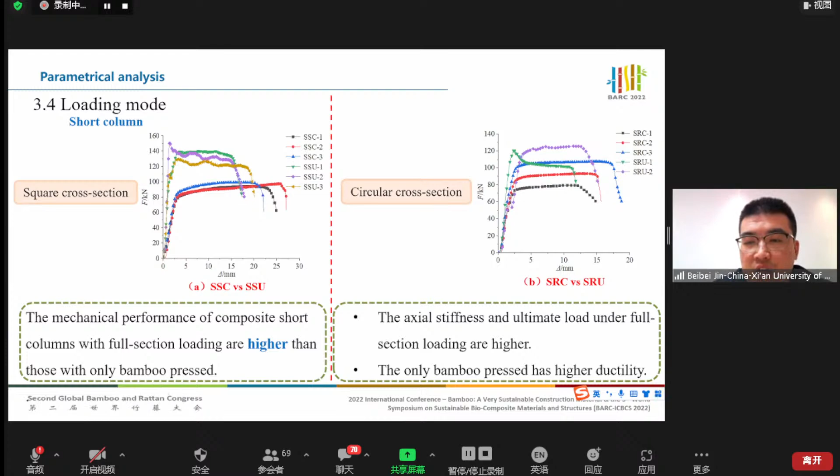For loading mode, short column square cross-section: the mechanical performance of composite short columns with full section loading is higher than those with only the bamboo pressed, because the mortar and the bamboo will both withstand the load. But with circular cross-section, the axial stiffness and ultimate load on full section loading are higher, and when only the bamboo part is pressed, it has higher ductility.

And slenderness ratio, basically the length to diameter ratio: for the round bamboo slender column, the greater the slenderness ratio, the smaller the axial stiffness, ultimate load, and ductility. We are also using a finite element model to conduct extended analysis, looking into the height of the column as a factor.

With the height of the column increasing, the axial compressive stiffness and ultimate load of the round bamboo slender column and the composite slender column decrease, but the mid-height lateral displacement increases. The ductility of the round bamboo column increases, while the composite column is the opposite.

Also, the thickness of the sprayed composite mortar layer: for the slender column, the axial compressive stiffness and ultimate load of the composite slender column increase with the increase of the thickness of sprayed composite mortar, but the ductility is basically unchanged.

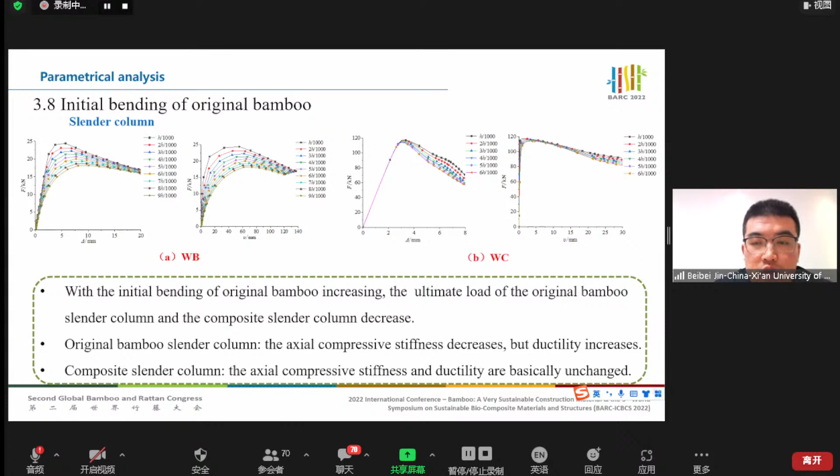This one is about initial bending of the round bamboo for the slender column. With the initial bending of the round bamboo increasing, the ultimate load of the round bamboo slender column and the composite slender column decrease. For the round bamboo slender column, the axial compressive stiffness decreases, but ductility will increase. For the composite slender column, the axial compressive stiffness and the ductility are basically unchanged.

The calculation formulae for the short column use the elastic ultimate bearing capacity, just as if we are calculating the capacity of reinforced concrete within an iron tube. And we are showing some fitting curves.

For the slender column, our assumption is that it is a thin-walled axial compression member with a variable section and thickness, with initial bending hinged at both ends.

So this is based on an established balance equation, a mechanical equation formula. And then we can extrapolate the buckling capacity of slender columns under axial compression.

This is the validation result. The error is within the 10% range, indicating the effectiveness of the calculation method.

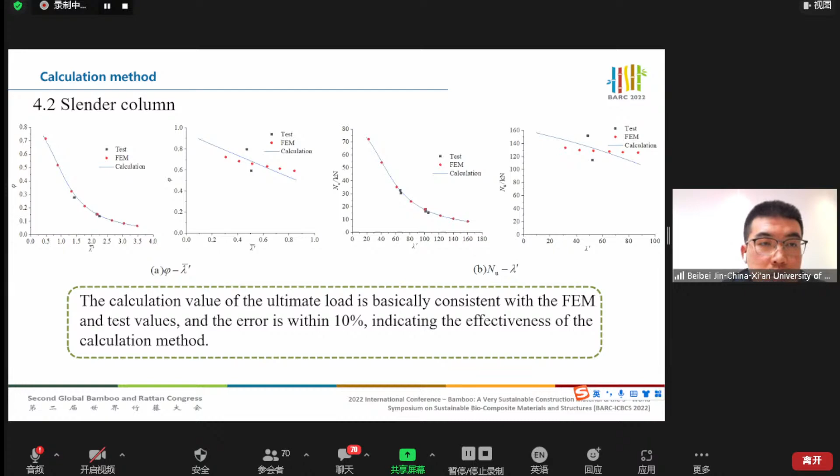Just an engineering application: in 2017, we designed a single-story bamboo skeleton building. First, bamboo skeleton installation applying waterproof materials and filled EPS board spray composite mortar, then install the roof panels and roof waterproofing construction. The whole building, in the end, is a real-life project, and a simple conclusion follows.

The failure mode of short columns is overall destruction of the bamboo. The failure mode of slender columns is overall buckling. Different factors have different effects on the axial compression performance, but all the details were presented before.

The calculation formula of compressive bearing capacity of short columns is derived from the superposition principle, and the calculation of both formulae are valid according to the test.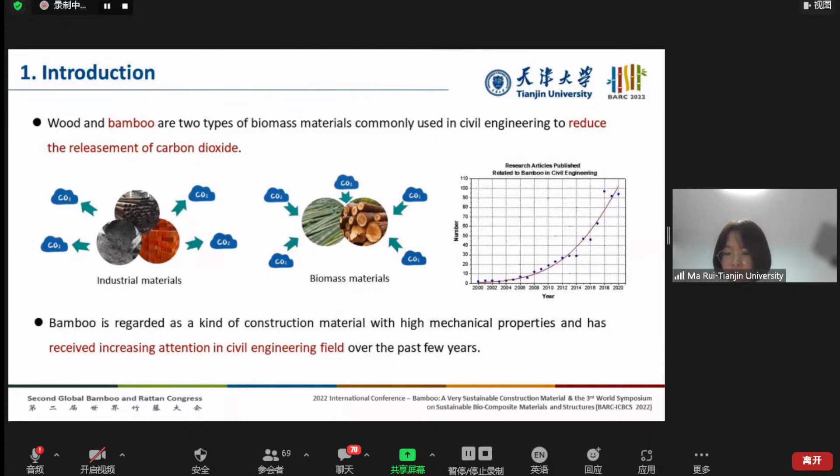Biomass materials with the ability to store carbon are widely considered as substitutions for these conventional building materials, like wood and bamboo. There has been a long history of natural bamboo as a construction material around the world, especially in the tropics and subtropics. Nowadays, there is still an ocean of bamboo structures constructed from bamboo columns in China.

However, they are constructed on the basis of experience in general rather than using modern methods, restricting the use of bamboo in construction. Due to their material nature, the geometric, physical, and mechanical properties of bamboo vary from one piece to another. To achieve the goal of standardized design, the foremost thing is to sort every piece of bamboo into specific grades. Attempts have been made to establish grading methods for bamboo columns, but there are still some deficiencies remaining to be improved.

Most existing studies focus on the classification process of natural bamboo to control the quality of engineered bamboo products, which is not suitable for the use of bamboo columns in construction.

ISO also provides the principles and procedures of grading bamboo columns when constructing bamboo structures. The specific grades of any bamboo species have not been defined.

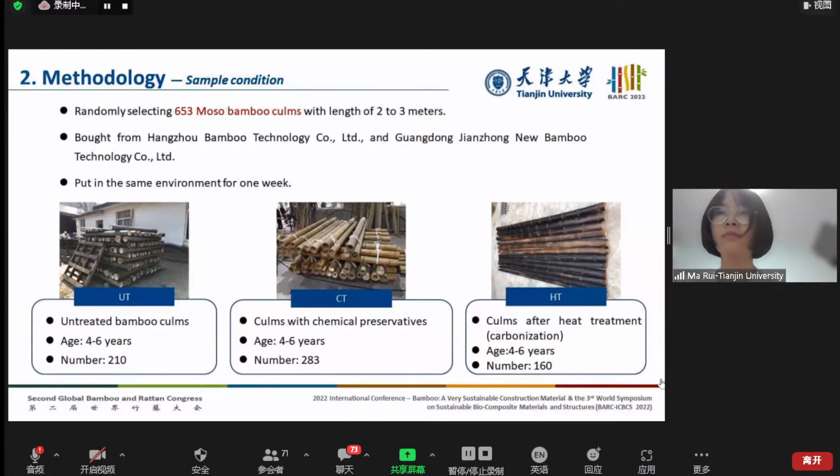All of the bamboo culms were put in the same environment for 1 week to avoid the influence of the environment. Length and perimeter were measured by the tape, while the external diameter and thickness were measured by the vernier caliper, and every culm was weighed by electric scales.

It can be seen that the difference between them is generally within 5%. Meanwhile, measuring the perimeter is more convenient than measuring maximum and minimum diameters in practice. Therefore, the perimeter method is recommended to determine the diameter of moso bamboo culms in this study.

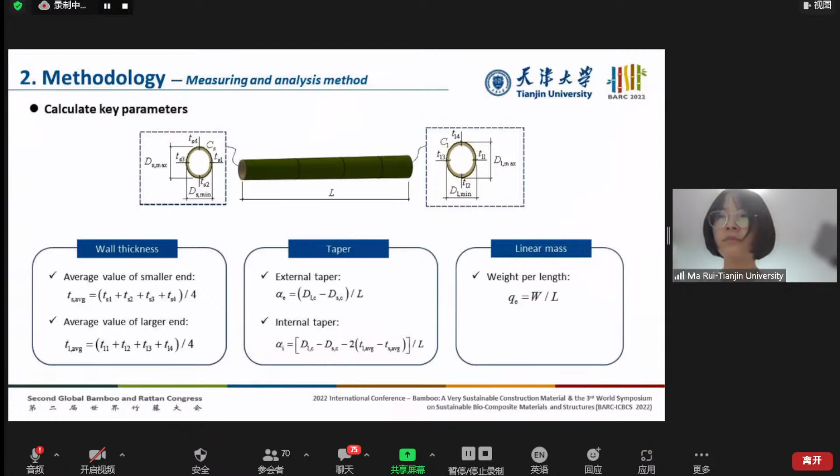As average, wall thickness of smaller and larger end, external taper, internal taper, and linear mass are calculated based on the following formulas.

To reduce the impact of sample size, the bootstrap method is adopted for statistical analysis of dimensioned parameters of different grades of bamboo. Let's see the results.

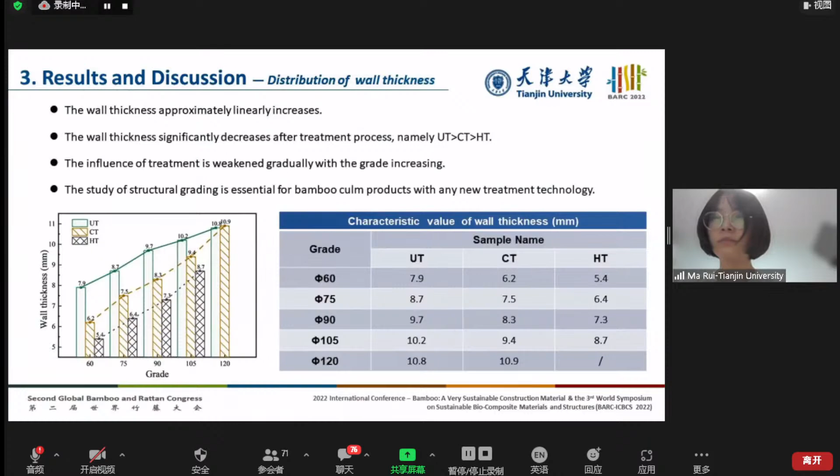Wall thickness significantly decreases after treatment process in the same grade. The wall thickness of UT is larger than that of CT and HT. The influence of treatment is weakened gradually with the grade increasing. Results prove that the study of structural grading is essential for moso bamboo culm products with any new treatment technology.

Internal taper value has no obvious variation regularity, but fluctuates at a level of 0.38%. Thus, the characteristic internal taper value of every grade can be considered as 0.38% for convenience.

For the distribution of linear mass, the value of UT is higher than CT and HT, illustrating that the weight of moso bamboo culms reduced after treatment due to the reduction of moisture content. As the grade increases, linear mass increases approximately linearly. The increase rates of CT and HT are slower than that of UT, proving that the effect of treatment process is greater for culms with larger external diameter.

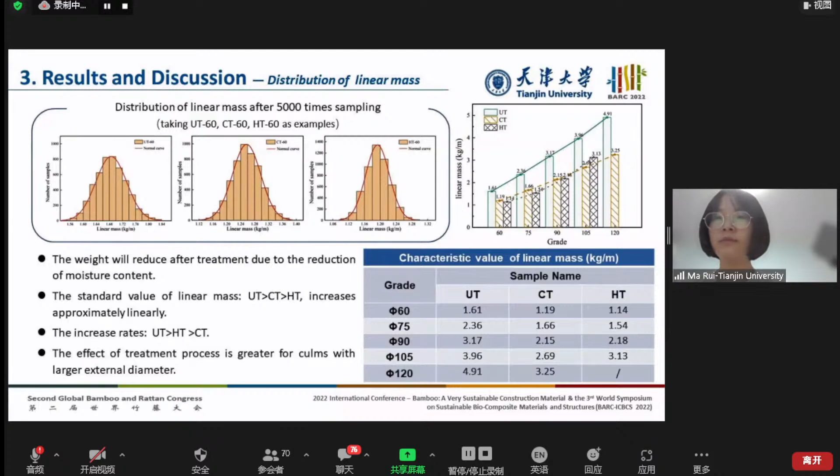Let's move on to the conclusion part. External diameter of moso bamboo culm could be determined by the perimeter parameter in practice based on its external diameter. Moso bamboo could be divided into 4 or 5 grades.

Treatment process has great influence on the geometry and the physical properties. Wall thickness and linear mass reduce significantly after treatment process. The study of structural grading is essential for products with any new treatment technology. And most importantly, characteristic values of graded moso bamboo culms are obtained in this study.

However, this paper is a preliminary exploration of bamboo grading. Much more data is needed to validate and improve the results of the study in practice. Meanwhile, the study on the mechanical properties of each grade has been carried on recently.

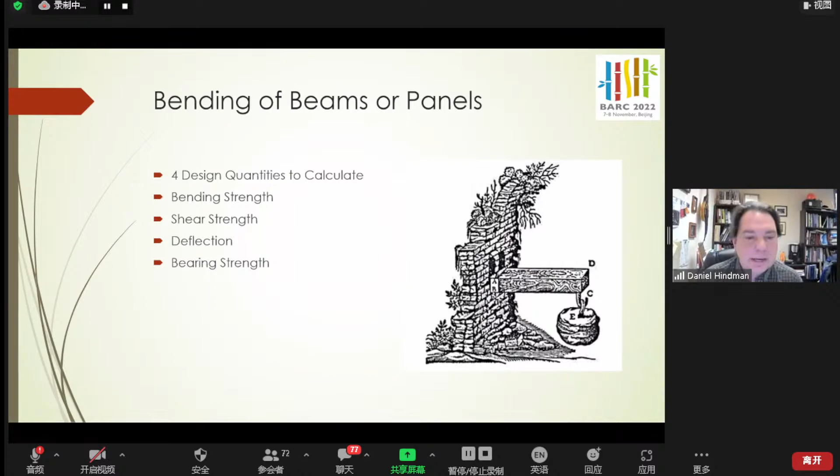As we started testing these panels, we started talking about where we should be placing the pieces of bamboo. Jonas has a strong interest in parametric design, and so we are able to actually look at the scanned poles of bamboo that we have and then choose where we want to place them within the composite. The question that started this was: should we try to place the nodes of the bamboo layers at support points for the beams?

As we talked about that, I think common knowledge is that the - we'll call it the crushing strength for now, but we'll take that apart in a little bit, or the bearing strength - is stronger at the nodes. Anecdotally, we felt that, but we wanted to understand what is the difference between the node and the internode, and also how crushing strength varies over the pole height.

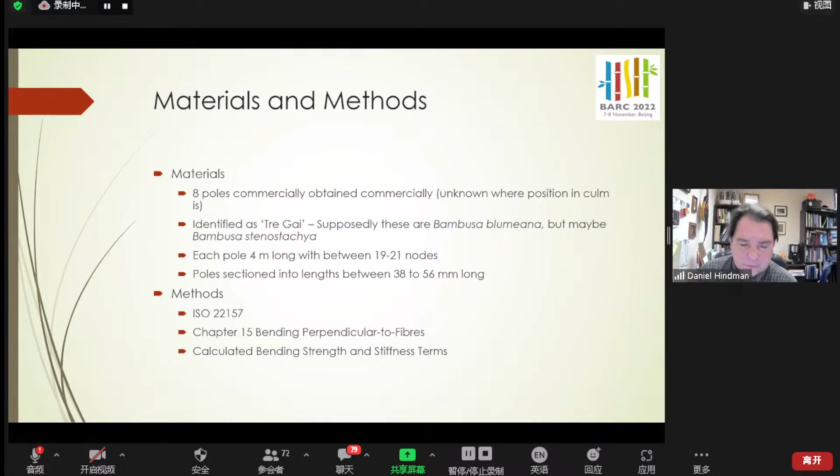Just to think about this - is this a compression test or a bending test? If we're talking about wood or a solid composite material, we'd be talking about a compressive test, with a uniform load throughout the entire section and a uniform stress following that. However, if we think about a ring being compressed, and take a quarter of that section and look at the forces, we have a force from the top of the ring vertically, but the corresponding force is at the center of the ring with a moment arm equal to the radius.

So what happens as you compress these rings is that moment becomes the critical force within the ring, and that's what causes failure. You tend to see a splitting of the rings, either what's called north-south - the top and bottom - or east-west, the right and left.

An essential part of doing ISO 22157 is to track the diameter and radius of the rings. Rather than trying to measure with calipers and have difficulty with that, we decided to use computer scanning - specifically Rhinoceros 3D.

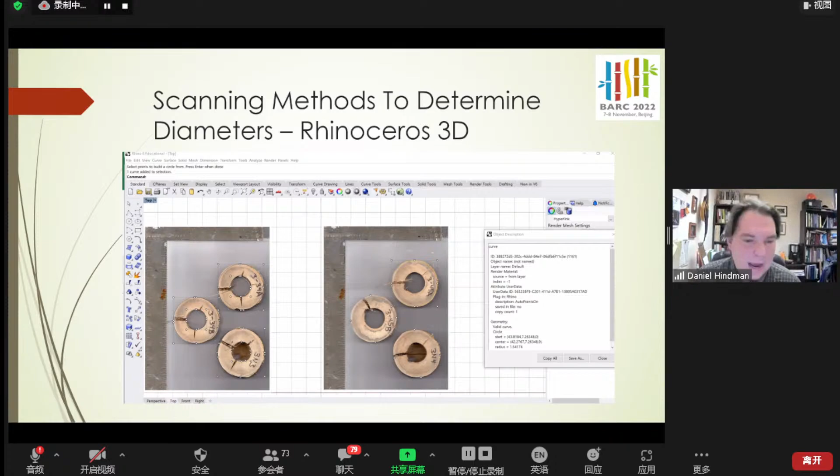We scanned the ring sections on a flatbed scanner and then imported those pictures into Rhinoceros 3D. Using several tools in Rhinoceros, we were able to pick points along the inner and outer circumference of each ring and determine the radius and diameter from those. We felt pretty confident in this approach. There's also a smoothing algorithm in Rhinoceros 3D, so we got a more averaged radius value that we could then use.

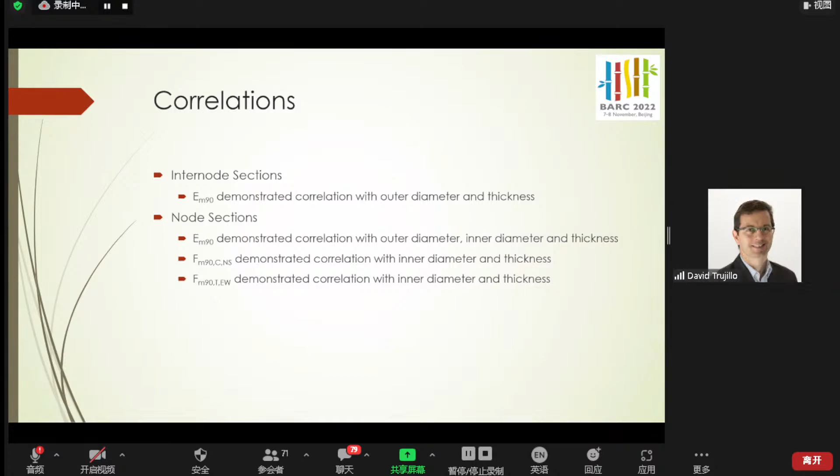So our conclusions were that we found the scanning methods were very helpful with determining the diameter and radius, and we found this to be an effective learning tool to show students how to conduct research and get research done that has less funding opportunities. Thank you.

That was a fascinating presentation, Daniel. I really very much enjoyed it, and I'm keen to share ideas on how we go about researching with students as a way to overcome difficulties with funding.

And now the question session. I've been scanning the questions as they come along. I don't know about you, Christopher, but I haven't seen that many questions popping up. Just one a moment ago. There is one that came right at the beginning. Maybe we can ask to rewrite the question in case we missed it. I think it's easier, right? So if you have any question, please type in the chat, since it's complex for us to go through all the discussion. Well, I've only picked up 3 questions coming up. I have loads, but I've only seen 3 from the audience. I don't know if you've seen any other.

I'm going to start with one I noticed a long time ago for Kent, which asked: how do you determine the pre-stress force required, and can it be done without pre-stressing? Also, is there any requirement on the fish mouth joint example for the gap allowed to cater for workmanship constraints in producing the fish mouth joint? Thank you for sharing.

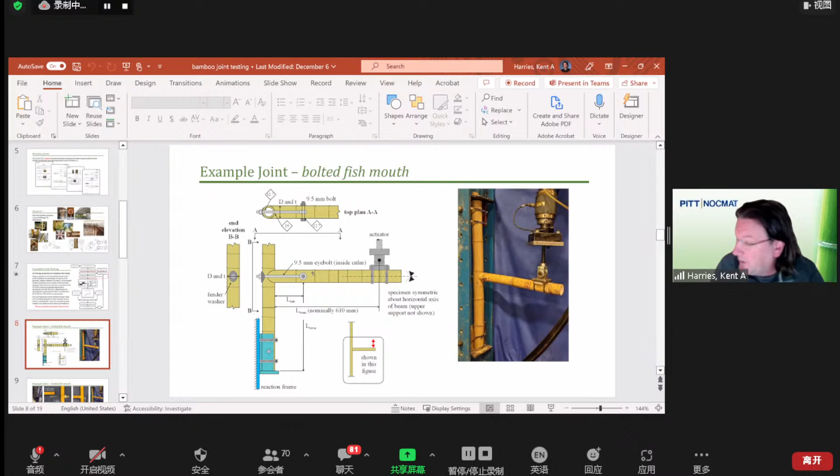I think you would struggle with it, partially because the bolt portion of the connection has a very low capacity based on the equations we have in there, which you and I both know are very conservative. So we would have - I've got to be careful how I say this - we would have underpredicted the average behavior if we're looking at nominal types of properties. We actually would have been pretty good on the characteristic - let me pull up that slide. That's more by luck than good management.

Okay, well, I'll pick up this one another day with you. We've got a lot to pick up on this, I assure you.

Christopher, have you picked another question? Because I noticed someone had raised one. I think there's a question in the chat box, repeated from Jim. He's asking Chuo, Meng, Luisa: what's stopping the industry from using clean tech, renewable energy to grow bamboo plus agroforestry, manufacture bamboo products, CLT, biocomposite, as well as in construction? Context - ultra cost efficient things like solar thermal induction, AIESS, plus microfactories exist that can further stay with the infrastructure buildings after construction, other is wasted, and it doesn't use lithium or gas or any toxic chemicals.

Who is willing to reply? In any case Jim, if you are connected you can unmute yourself and ask directly - I read your question. Luisa, do you want to give some comments?

I can try to answer looking at the Italian situation. I think in Italy, first of all, there isn't a lot of bamboo so far. The plantation is growing, so more material will be available in the near future. But I think there are two main limits of bamboo at this moment. One is a cultural feeling that bamboo in Italy is something exotic, so there's some cultural feeling to overcome. And second is the standards - this is also something we are dealing with. So I think this is also something that could be overcome.